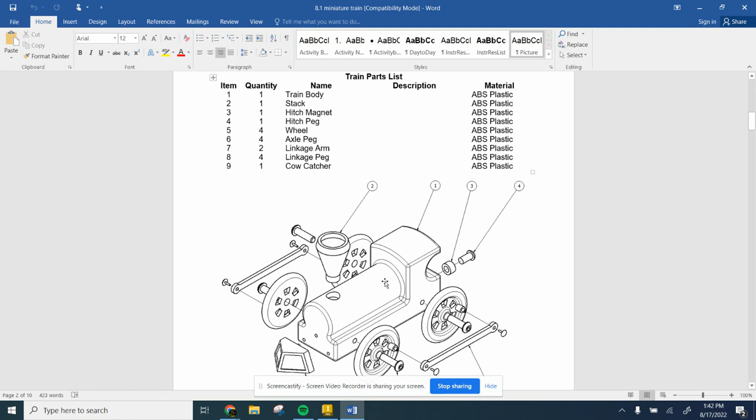We're going to start working on the train. The train is a great project where you really start putting some of your skills together. I recommend you try and go through the drawings on your own to see if you can build the parts, especially after the first piece, once we go through this.

So if you look at this first part, which everyone should have, this is the basic train. And so what I see here is a rectangle on the bottom, a cylinder here, and like a unique shape on the back. So what I'm going to do is I'm going to build onto that. So I'm going to start off with the bottom part.

Remember, we talked about in class how these arrows and the lines show us what we're dealing with, right? So if you want to figure out the shape of this rectangle on the bottom, first we'll start off with the 2D of it. So how far is it from side to side? That's from here to here. The lines that match up with that are on the bottom. So this is 2 inches for one, and then this direction is the other one. And so that line there and that line there, that's 5.5 inches.

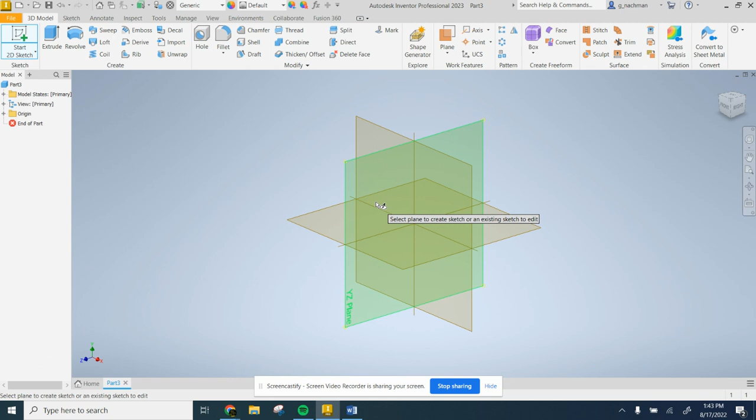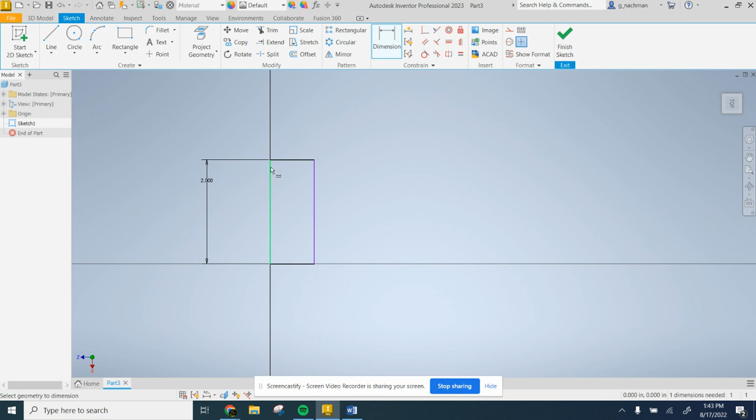So, oops. We're going to create a new part, standard IPT. And any one of these is fine. We can start off with a rectangle, and you could just kind of put it there, and then we could dimension it. And it was 2 inches. So it's too big, so we can scroll out, if you remember, with the wheel. And then I think it was 5.5 inches. Yeah, 5.5.

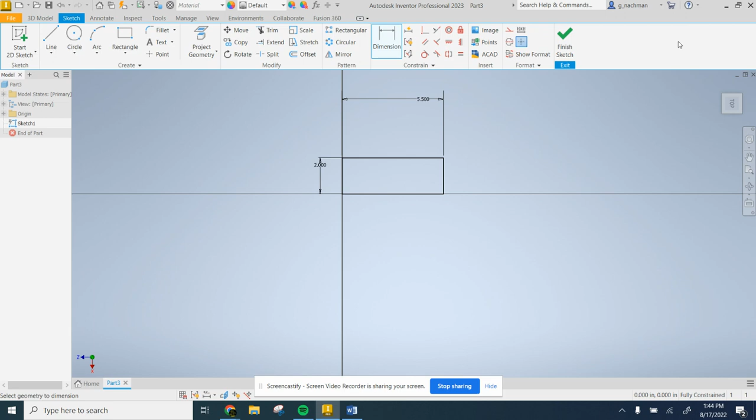You can see that. Now, how thick is this? How tall is it? There's a lot of lines kind of together here. If I look here, that's kind of too short. The only real line that connects to this one is this line here. And I go where the arrow is. Oh, this arrow points to it, and it's from the bottom. So that's 0.875. That's how big that's going to be. So I'll finish our sketch and make it 3D. And that's 0.875, I think. All right. And dimensioning from here on out is very, very important.

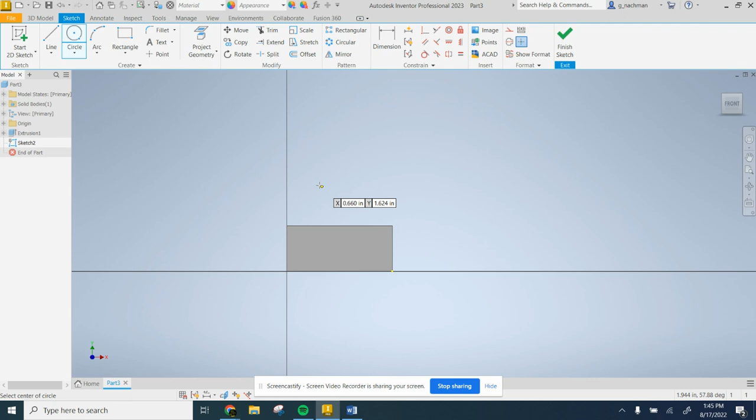The next piece we're going to do is this cylinder here. So we'll figure out where it starts, and then we'll go from there. So let's put a sketch here. And to start off with our cylinder, gotta make a circle. We could have also started off with a point and dimensioned it, which is great too. So let's look. We're dimensioning it from the center of the circle to the bottom. And I don't know how much that is, but I see a center of the circle, and I really only see 2 lines that come to that. So this line over here doesn't really help us, but this line that goes all the way down here to the bottom there is 1.75.

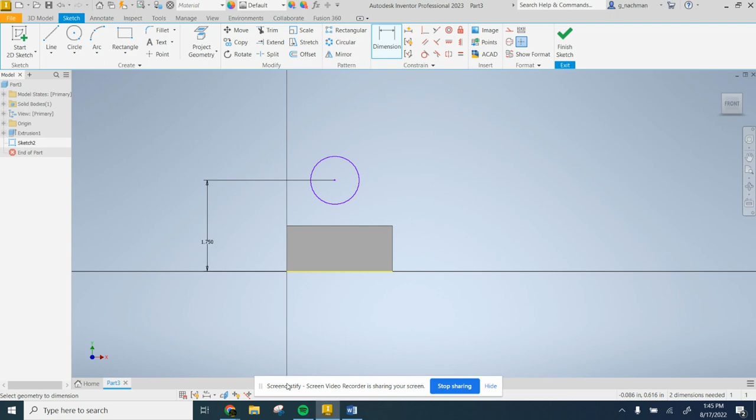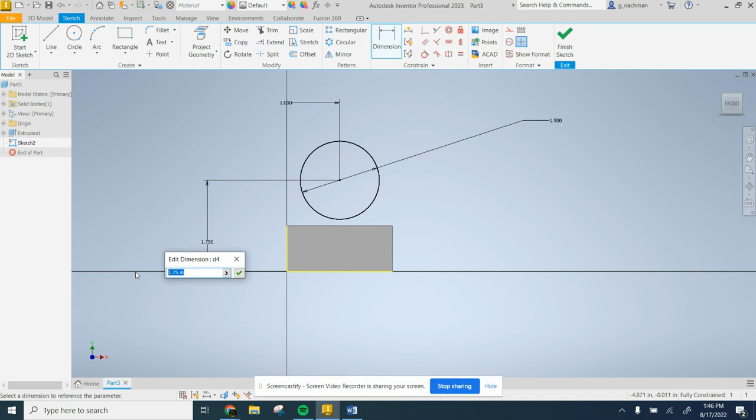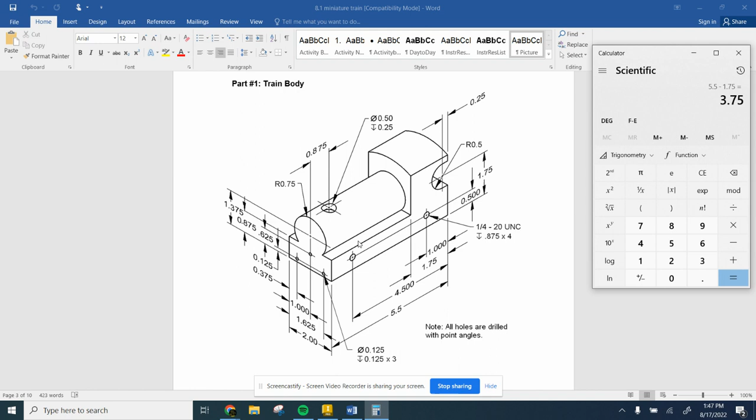Now, this is going to go back, which is great. But I'm going to have to do some math to figure that out. Because the only thing I see here is this 1.75, but that's from the back to there. That's not from here to here. So we'll have to do 5.5 minus 1.75, which is 3.75. And that gives us this distance here. So we'll extrude. We'll put in 3.75. It's going the wrong way. And so to change that, if you remember, there's all these options here. We can change it. And now it's cutting. We don't want it to cut. We want to join. We want to add it.

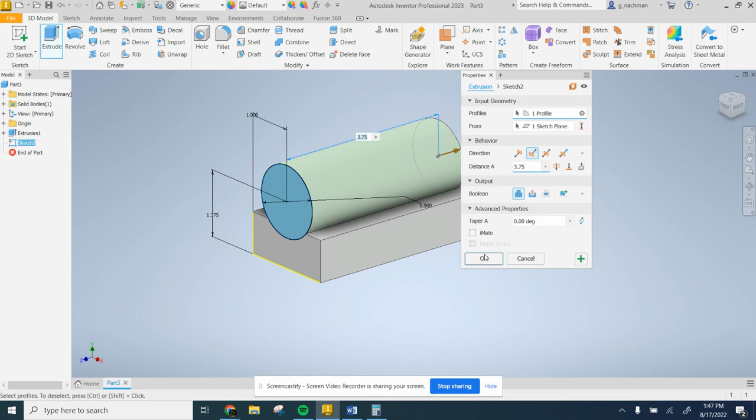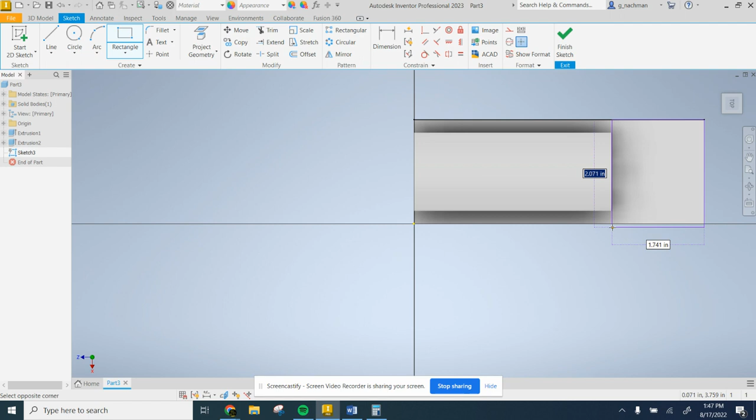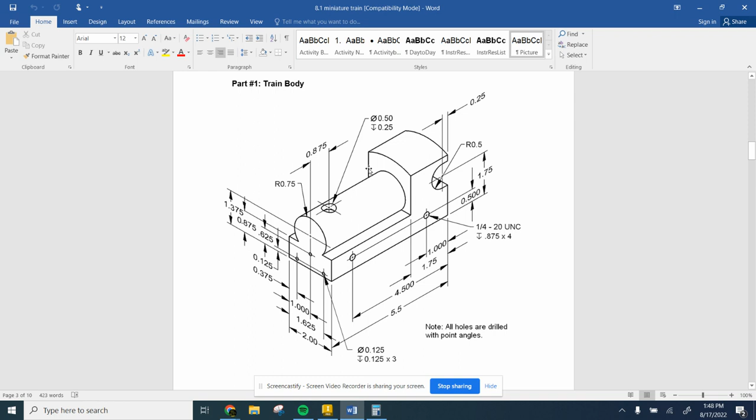And then our final piece for this video is going to be the top, or this section over here. And the only thing I really know about this is this distance, and that was 1.75 from before. And I just know that it's that wide because it's the same width. Okay. Now, this part is curved, so I don't really know how big that is. This tells us down here, but it's kind of off. So I am just going to make it taller than it needs to be, knowing that we're gonna have to mess with it to make that curve. So this is video 1 of the train.